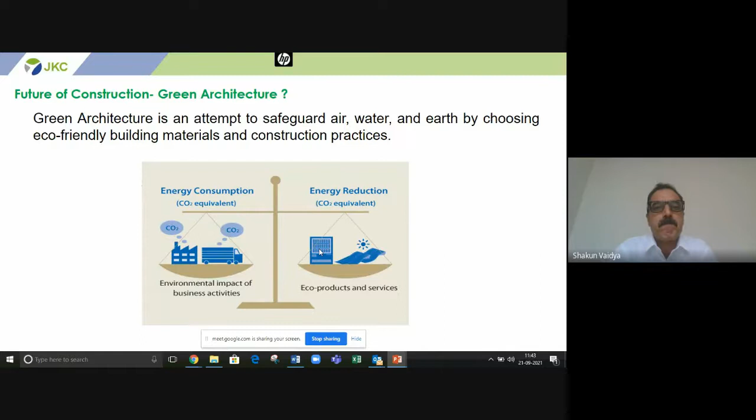So why green architecture?

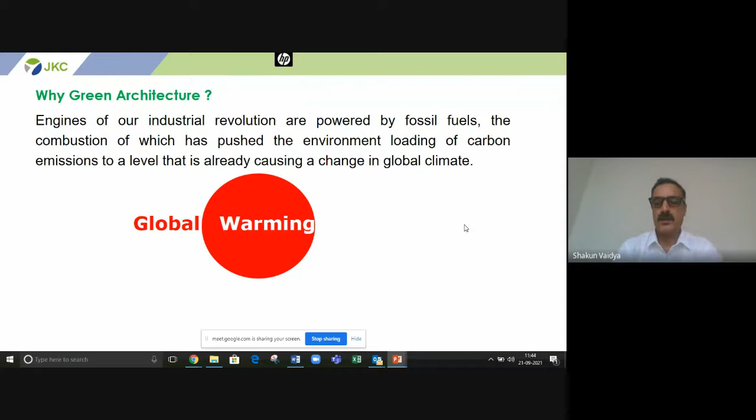Industrial revolution is powered by fossil fuel, the combustion of which has pushed the environmental loading of carbon dioxide to a level which is causing change in the global climate. So it is an alarming situation as of now. And how do we address this? In today's era, we continue to run businesses for short-term benefits with no attention on environmental and other consequences arising out of this activity. Not a very sustainable way of doing business.

If we consider cement and concrete, there is the requirement of high strength concrete.

Am I audible? Yes sir, you are audible. All participants please keep your mic in mute mode. Sir, slides are not moving, from the third slide onwards. Ma'am, it's moving, maybe there is a network issue in your device. Now the slide is opened. Probably bandwidth issue, some participants might be having net issues, that's the reason there's a lag between transmission and reception.

So as I was discussing, the requirement for high strength concrete has been there for ages now, resulting in a lot of production of OPC. This scenario changed in the early 90s when the cement industry switched over partially from OPC to blended cement variants like PPC and PSC.

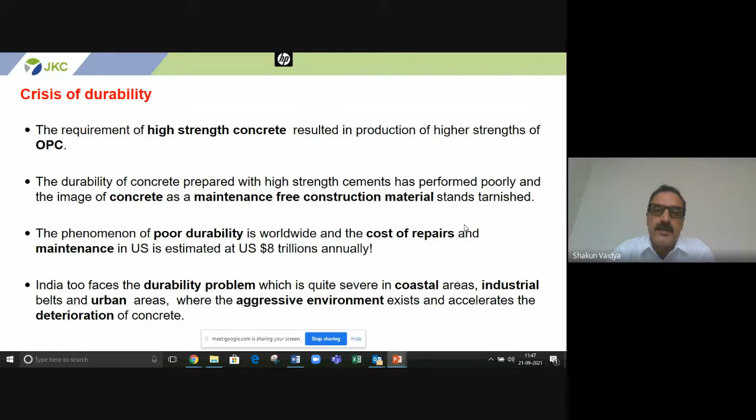So this challenge is there in our own country. And how is the cement industry addressing this? I'll let you know in the coming slides.

So what is cement? Cement is a glue which binds everything together. Technically speaking, hydraulic cement produced by pulverizing clinker, consisting essentially of hydraulic calcium silicates, usually containing one or more forms of calcium sulfate as an interground addition. A commonly known definition is a material with adhesive and cohesive properties, which make it capable of bonding mineral fragments into a monolithic mass as a whole.

Concrete has to be cast monolithically, and concrete is where the entire load of a structure comes, and 70% of the cement gets consumed in concrete. Concrete is important because it is one of the most consumed materials on earth after water. It is also said that it is one of the most revolutionary inventions, after the invention of fire and wheel. So concrete is very important. All structural members are built with concrete. So it is imperative that we produce concrete with eco-friendly materials which are far more durable and long-lasting.

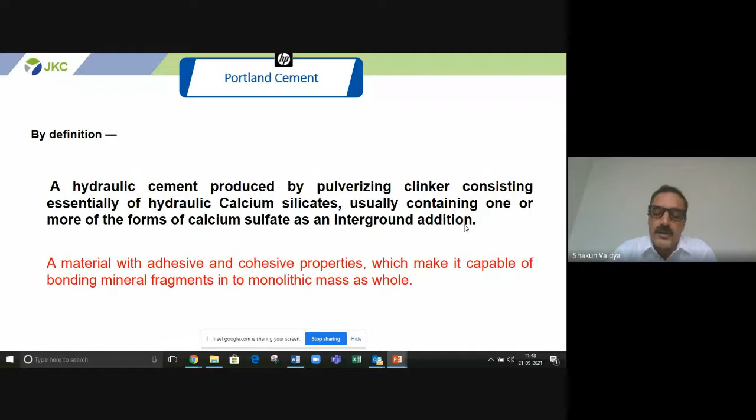Typical types of cement as per IS 456-2000: we have OPC grades of 33, 43, 53. Now this has also changed. The IS number is now IS 269 for 43 and 53 as well. So it is IS 269 33, IS 269 43, and IS 269 53 now.

And then we have other variants, but the most widely used material is PPC, Portland Pozzolana cement. And then in east and parts of south, we have slag cement. And the most latest variant is composite cement, which has not been enlisted in IS 456-2000, the latest edition of IS 456, but we have a BIS code for that, so it is also there. Apart from that, some special types of cement are also there.

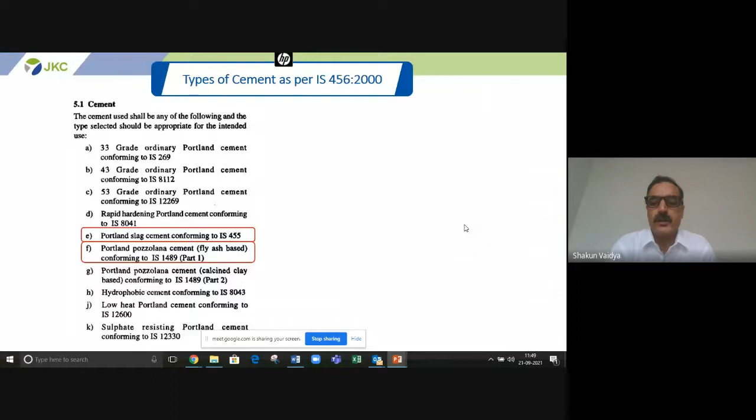So considering typically the Indian market, what's the breakup of cement usage? OPC was 90 to 100% if we consider the era before 1990. Post that, now it is PPC. PPC is a binary blend between Portland cement and fly ash, which gives us silica, or PSC, which is also a binary blend, Portland cement mixed with slag sourced from steel plants.

And then the latest variant launched in India is composite cement. It is a ternary blend, a mixture of Portland cement mixed with PPC and PSC both put together. Then we have some special grades of cement: sulfate resistant Portland cement, oil well cement, super sulphated cement, high alumina cement. These are very special cements required for specific requirements and constitute about 2 to 4%, manufactured on specific special orders, not as a practice. So mostly it is PPC, which is present through the length and breadth of the country and is one of the most popular variants of cement available right now.

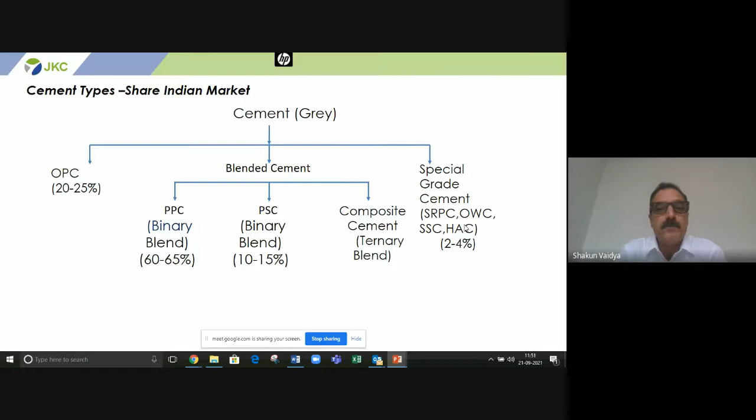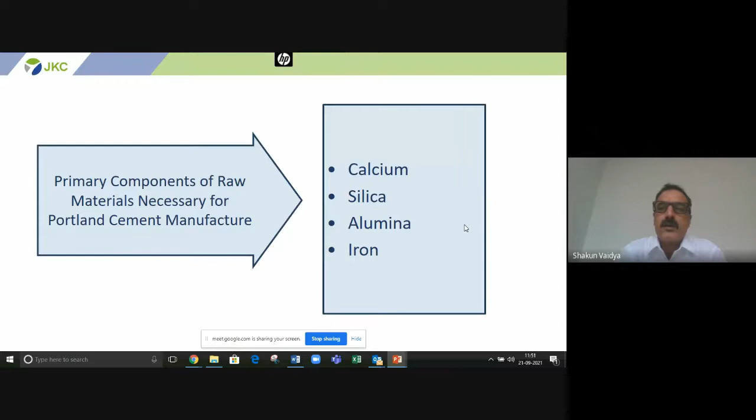The primary constituents of raw material necessary for producing Portland cement are calcium, silica, alumina, and iron.

Raw materials for producing clinker are majorly limestone, and then iron, alumina, or bauxite. Raw materials for producing cement are clinker mixed with gypsum. Gypsum will retard the setting time of the cement. This is how cement is produced.

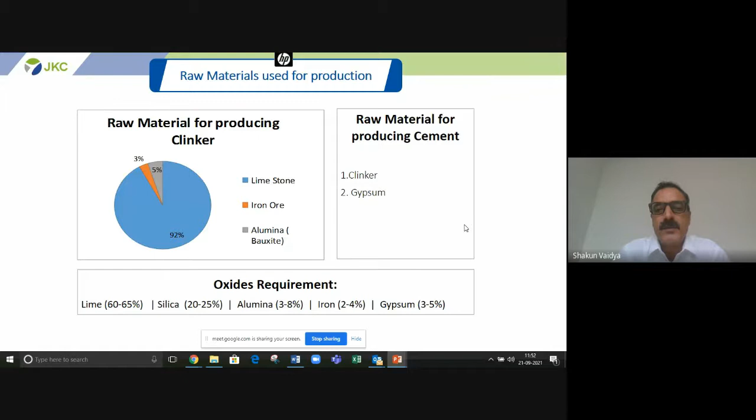The typical oxide requirements are that lime should be around 60-65%. In clinker, silica 20-25%, alumina 3 to 8, iron 2 to 4, and gypsum. Gypsum, as I told you, is mixed in the end to retard the setting time. Unless this is mixed, cement may set instantaneously. So this is just to retard the setting time, which facilitates easy usage of cement.

Pozzolanic materials are lime and silica-rich materials. Typically, it is silica only. In fly ash, it is silica, and in slag, it is lime as well as silica. Fly ash is silica-rich material, which reacts with cement and helps enhance its cementitious properties. They may not have cementitious properties on their own.

Common sources are volcanic ash, burnt brickbats, clay, rice husk, fly ash from thermal power plants. Fly ash from thermal power plants in India is one of the major sources, where we get silica-rich fly ash, which is blended with cement. India's thermal plants are in abundance throughout the length and breadth of the country. So we have a lot of thermal plants where coal is burnt and energy is produced. As a resultant, we get fly ash, which is brought to a good constructive use by the cement industry.

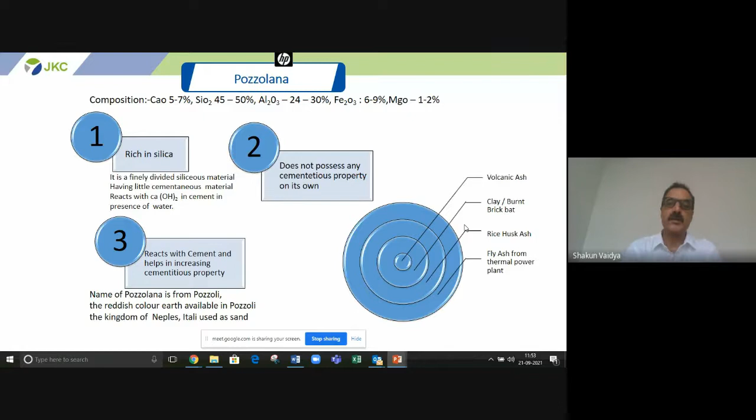These are the phases of clinker, and as is visible, C3S and C2S are the two major compounds responsible for the early strength. 1 to 7 days strength is solely responsible by C3S. Initially the gain of strength is very rapid in the initial 6-7 days. Then it tapers down, and the balance is almost through C2S, with small fractions of C3A for high early strength and C4AF as a flux.

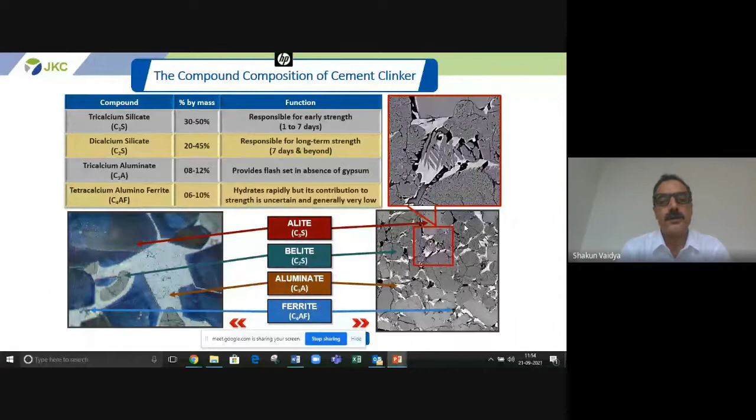So what are supplementary cementitious materials? How do they benefit cement and concrete and result into durable structures?

Portland cement mixed with water - typically this is how cement is used. The resultant product is calcium hydroxide, Ca(OH)2. Too much of Ca(OH)2 may result into making the concrete unsound.

The excess Ca(OH)2 reacts with the silica of the SCM, and it produces a byproduct known as calcium silicate hydrate gel. This is the secondary reaction, and this calcium silicate hydrate gel, through the reaction, produces a secondary glue, I would say, which further reinforces the concrete.

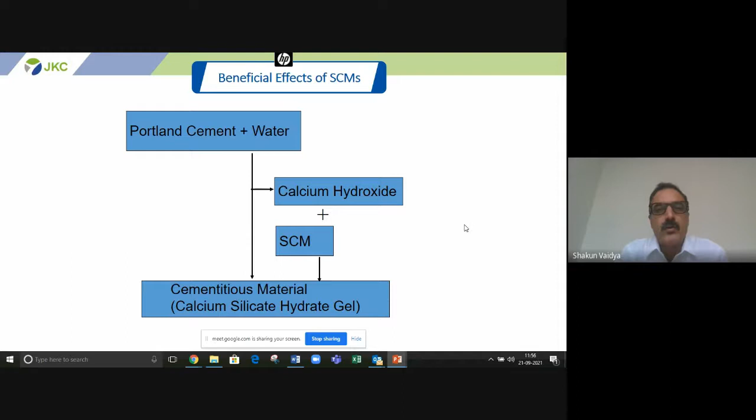The capillaries are choked, they become more refined with passage of time, and capillaries are absolutely blocked if the environment is conducive. So this is how a typical blended cement chemistry works - pozzolanic material plus calcium hydroxide plus water produces CSH gel, which further reinforces the concrete and blocks voids and capillary pores, lowering permeability and increasing durability.

The challenge is only to lower the permeability of concrete. Finer the pores, the more refined they are, the lesser is the probability of moisture or other chemicals reaching the embedded steel.

So the challenge is only how to preserve the steel in RCC, because we cannot think of building structures nowadays - 100, 120, 150 storied high skyscrapers, long bridges of several kilometers, flyovers, busy highway intersections - cannot be thought of without RCC. And in RCC, the only challenge is how to keep the embedded steel inside the concrete in a passive state so that it does not corrode and carbonation does not take place.

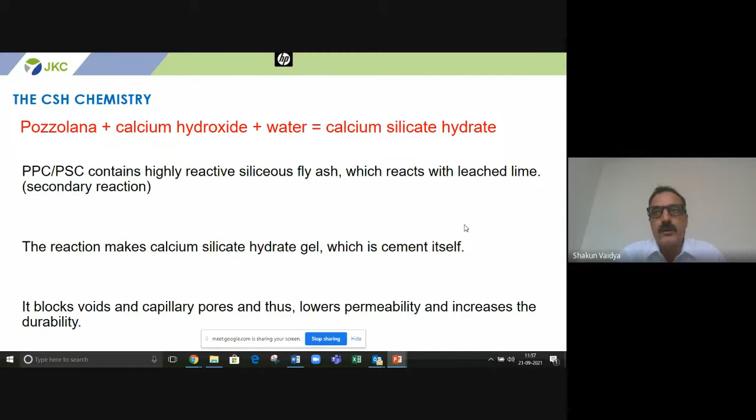So why blended cements? Blended cements produce more durable concrete through blending with supplementary cementitious materials.

Fly ash and slag, as I told you earlier, are the two most commonly used supplementary cementitious materials. Slag is rich in lime, as you can see, while in Portland cement it is high and rich in lime, and then silica is also there. In fly ash, it is rich in silica but has less lime, negligible lime quantity. In slag cement, it is rich both in lime as well as silica. So this is typical chemical oxides for various SCMs.

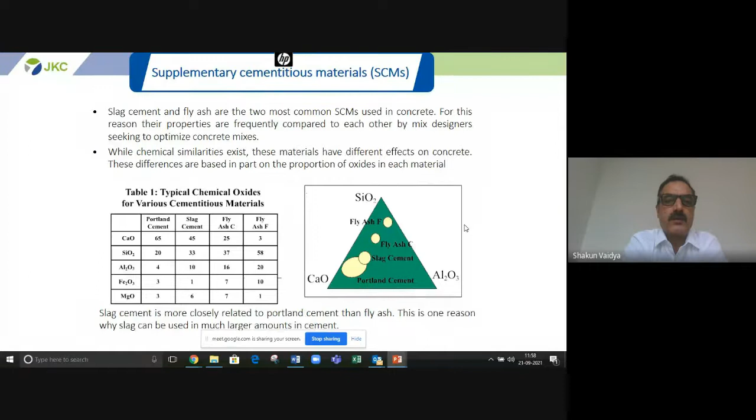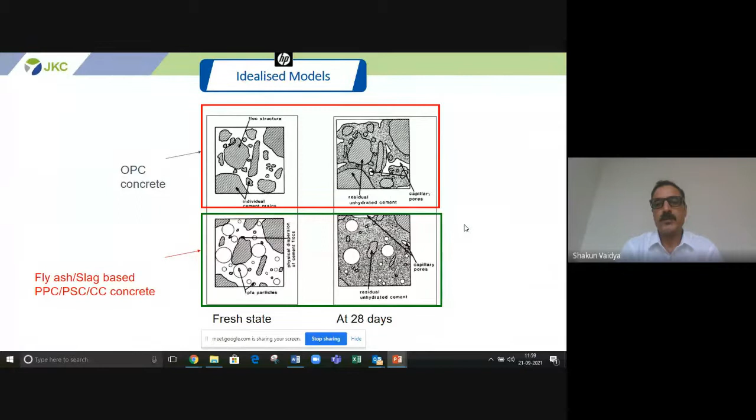Idealized models of concrete show at the top OPC concrete made with ordinary Portland cement is much more fragmented, while concrete produced with fly ash or slag based cements shows much more refinement, appearing much more dense and impervious at 28 days. This is how pore refinement should typically take place.

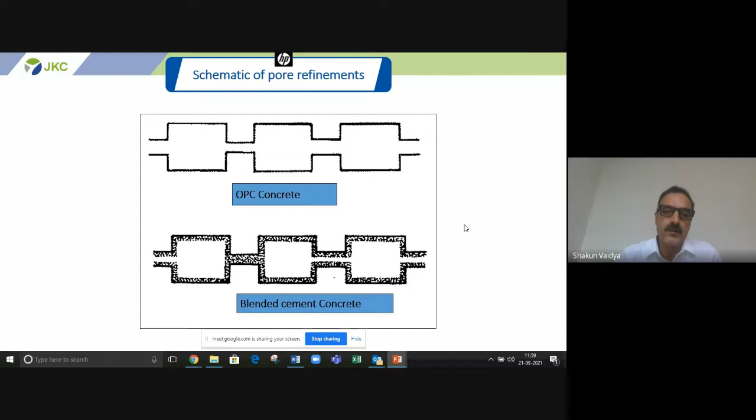With passage of time, if the environment is conducive, it has been established worldwide that any design strength would achieve double the strength in 8 to 10 years. So M20 can achieve a strength of M40 and even higher with blended cements if due care is taken.

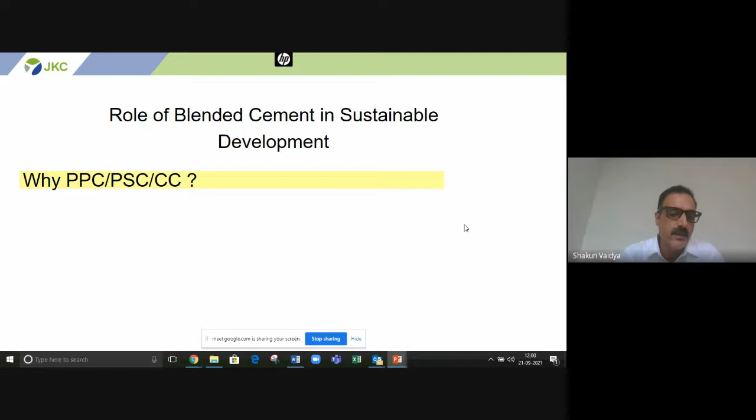So what is the role of blended cements in sustainable development? Why Portland pozzolana cement, slag cement, or now composite cement, which has been introduced in some parts of India? Though I belong to the cement industry, cement industry is notorious for emitting a lot of carbon dioxide in the air. About 7% of the total carbon dioxide emitted is alone by the cement industry, and it is a compulsion to produce cement, especially for rapidly developing countries like India.

India is the second largest cement producer in the world after China. Though in terms of per capita consumption we are still less, in terms of production we are at number 2 in the world. One ton of cement emits almost an equal amount of carbon dioxide into the air.

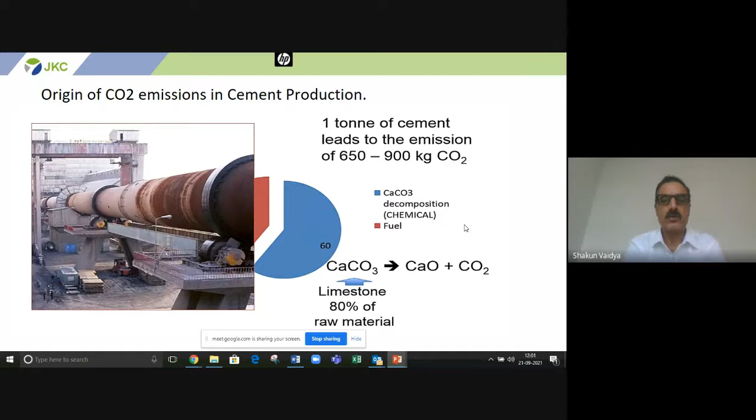Through the burning in kiln, CaCO3 drives out carbon dioxide, and the resultant product we get is CaO. Limestone is 80% of the raw material, as I showed in the earlier slides also.

As you know, limestone is required majorly to produce cement, and limestone is a natural resource, and natural resources are depleting fast, becoming a very scarce product. At the present rate of consumption, we may end up exhausting all our limestone reserves in the next 40 to 50 years.

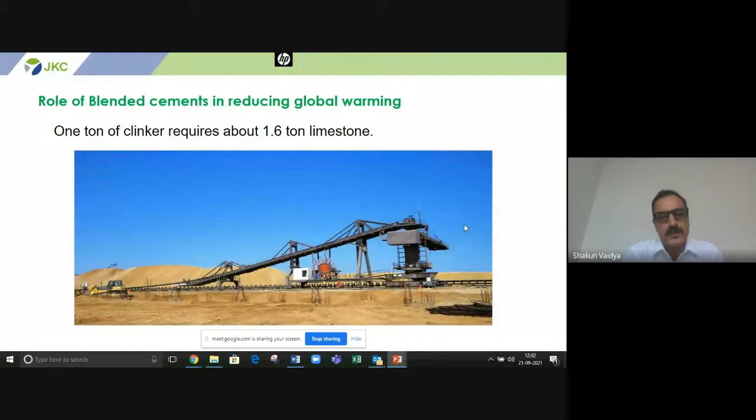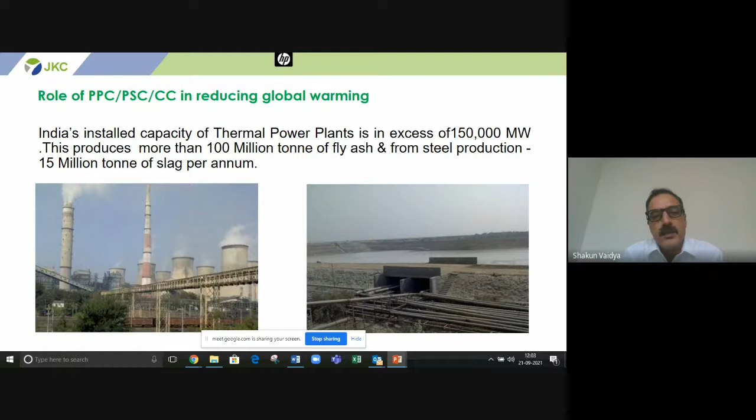Apart from limestone being in short supply, which may exhaust in 40-50 years, the second challenge is that in India electricity is produced majorly through thermal plants, so we have a lot of fly ash in abundance. We also have steel in many parts of India, majorly east and south. These are two products which otherwise cannot be used and can pose an environmental threat, but are effectively utilized in cement. So the cement industry is doing its bit by consuming a lot of fly ash and slag.

So by producing blended cements, how are we reducing global warming? CO2 emission can be brought down 25 to 50%. Fly ash utilization of 60-70% can be effectively achieved. And limestone reserves' life can be enhanced from the present 50 years to 100 years.

If we opt to go for blended cements, we require less clinker. Less clinker means less burning of limestone. Less burning of limestone means less burning of coal, and even lesser emission of carbon dioxide into the air. And this has been proven worldwide that concretes produced with blended cements are much more durable and long lasting vis-a-vis OPC.

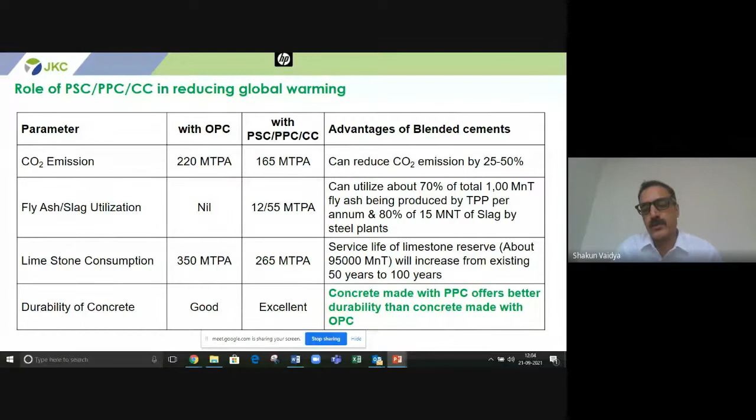So this is a three-pronged strategy for achieving sustainable development: reducing carbon dioxide emission, preserving limestone, and utilizing fly ash and slag, which otherwise can be a huge threat to the environment.

So think green, live green, and go green is the mantra nowadays. Every cement company is thinking of how to reduce carbon dioxide and how to become carbon dioxide negative in the coming years.

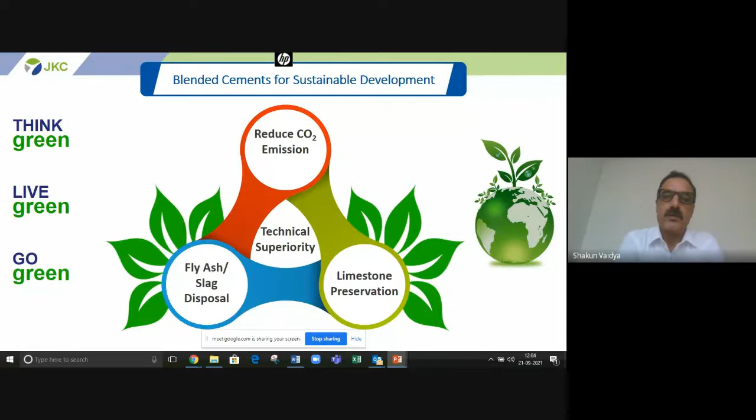The latest variant in this category is composite cement. Since PPC and PSC are known to everyone, having been introduced long back, now 3-4 years back, this new variant of blended cement, composite cement, was launched.

Though it is not available in this part of India, northern India, it is becoming very popular in East India, where this was launched around 3 years back, when the BIS permitted the use of composite cement and the code was also released. But since we do not have slag here in north and west, producing composite cement as of now is a challenge. Yet this is one of the very futuristic blends of cement, which uses fly ash as well as slag simultaneously with Portland cement.

This code was IS 16415. It was formed in 2015, released in 2016, and commercial production started somewhere in late 2017 in the eastern part of India. This permits simultaneous use of fly ash and granulated blast furnace slag or GGBS. NCCBM conducted a lot of studies on this, and investigation was carried out, and then this was granted permission.

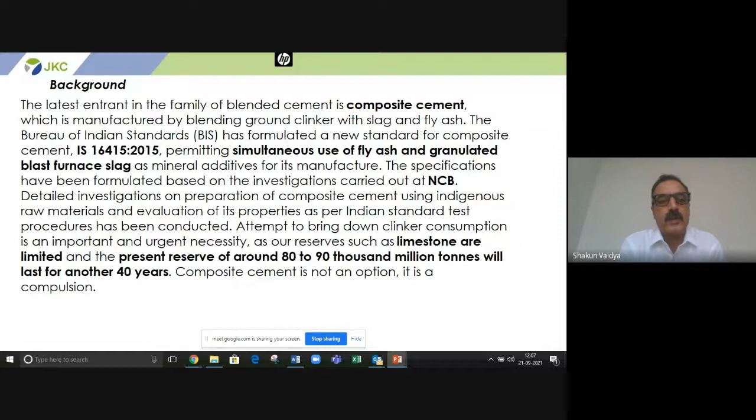Since limestone is limited, this is a very practical solution to bring down limestone consumption, apart from other variants like PPC and PSC.

Composite cement is produced by intergrinding or intermixing of clinker, granulated slag, fly ash and gypsum. This enhances sustainability, reduces the clinker factor, and effectively uses byproducts such as fly ash and slag.

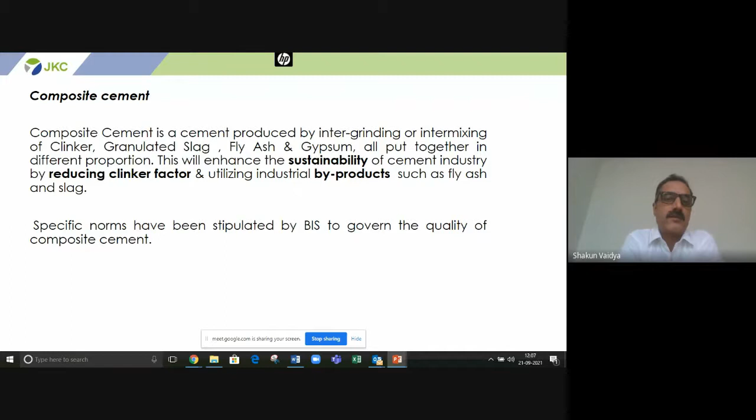It is an all-rounder, you would say, because we can say that it has the toughness of steel and strength of silica. Slag, though not steel, is a byproduct of the steel industry, and the silica is very reactive.

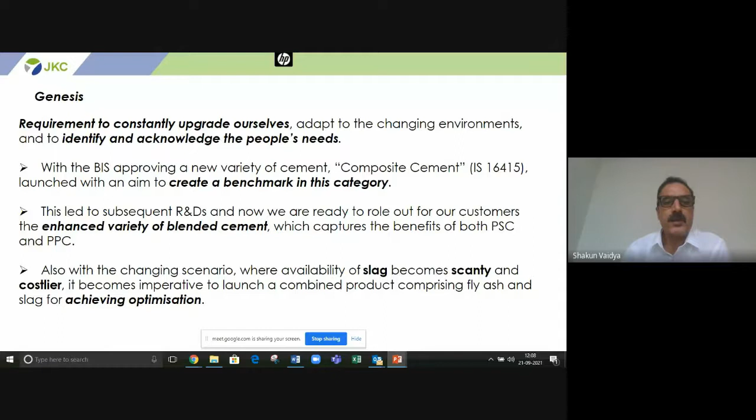So why this need of composite cement? Because we need to constantly upgrade ourselves, identify and acknowledge the requirements of today. It was launched to create a benchmark in this category, which led to a lot of research and development, and an enhanced variety of blended cement was launched.

Composite cement, by definition, is an intimately ground mixture of OPC clinker, granulated slag, fly ash and gypsum. The permitted proportions as per IS 16415 are that clinker proportion varies from 35 to 65%, cannot be less than 35, can go up to 65.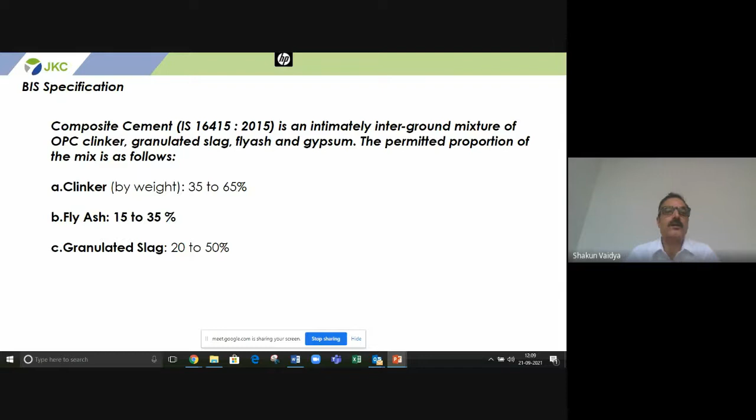Fly ash proportion is 15 to 35%, GGBS is 20 to 50%, but the combined blending of fly ash and slag cannot exceed 65%, with a lower limit of 35%. This is the broad guideline given by the Bureau of Indian Standards.

The same specification has been given here. The physical parameters of this cement almost match the physical parameters of other variants such as PPC and PSC. I'll show you a chart in the coming slides.

It has to have a minimum fineness of 300 meters square per kg. It has to be sound, so 10mm or autoclave 0.8 is the permitted value in percentage.

Initial setting time, the time period after which hardening should take place, is 30 minutes. Final setting time is 600 minutes - this is the time when the paste or concrete should ideally lose plasticity and start hardening.

Compressive strength is common for all the variants at 3, 7, and 28 days: 16 MPa, 22 MPa and 33 MPa or 330 kgs per centimeter square is the requirement, similar to PPC and PSC, and drying shrinkage is 0.15.

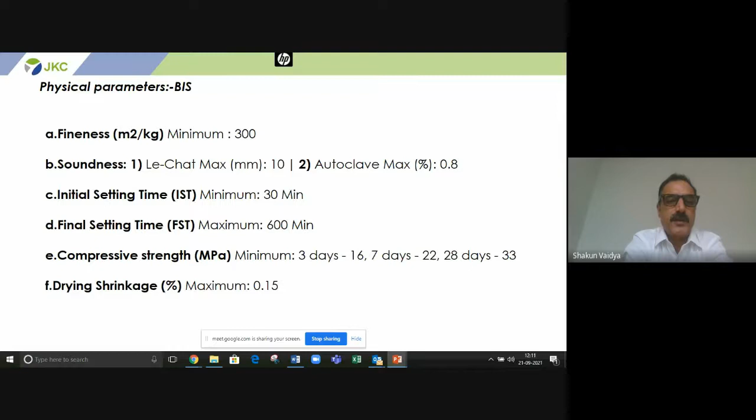Chemical requirements: insoluble residue ratio is arrived at by this formula, where X is the declared percentage of fly ash. MgO makes the mix unsound, so this is the percentage given here. SO3 content, sulfide sulfur, loss on ignition - these help arrive at the impurities present in the cement.

This is also an indication of the fly ash present, which is 5%. Chloride content is very important to track - 0.1 for normal concrete and 0.05 for pre-stressed concrete. This is very important because it initiates corrosion. Alkali content 0.6 is the permitted percentage, similar to slag cement.

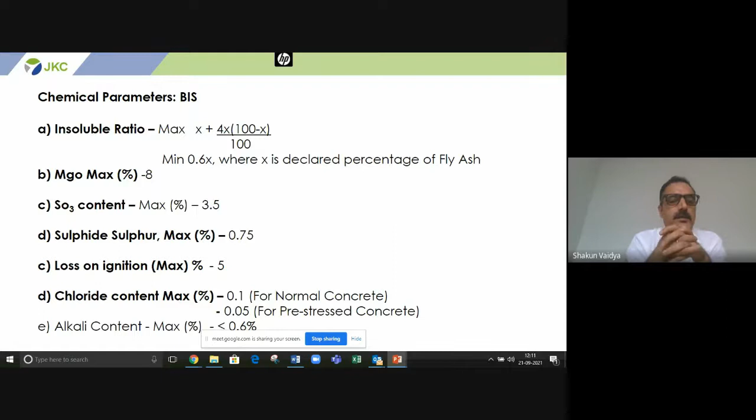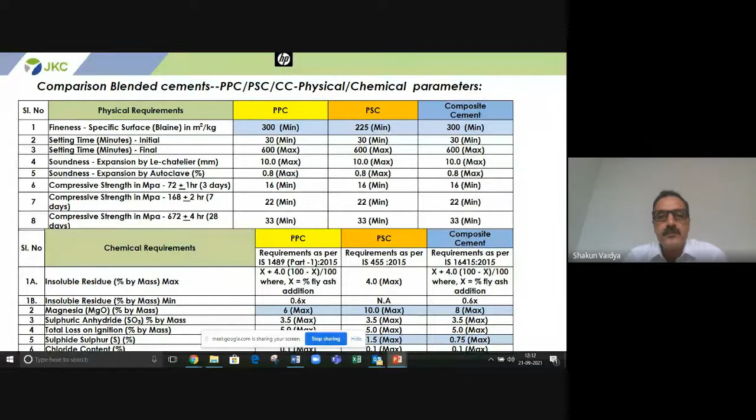So in a nutshell, comparing PSC, PPC and composite cement, you can see that it is almost similar, barring the chemical requirements where we do not mix fly ash. So this X factor is not there in PSC. Otherwise, other parameters are almost similar.

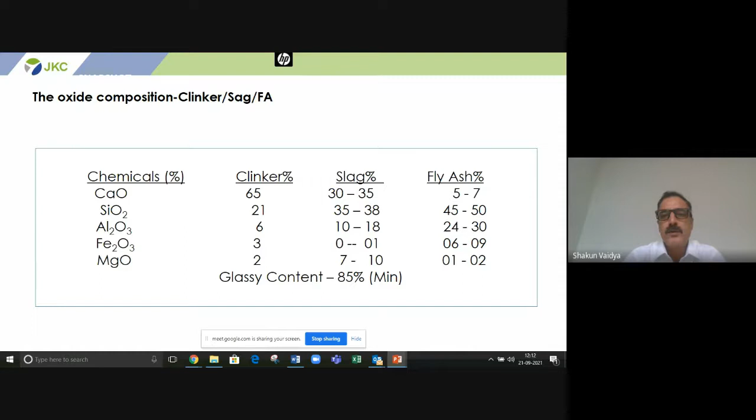The only requirement of a supplementary cementitious material is that it has to be rich in silica, or rich in lime, or rich in both lime and silica. This table was displayed earlier - slag should be rich in both lime and silica, and fly ash rich in silica.

So OPC properties and its suitability. For ordinary Portland cement, the compounds C3S and C2S should be around 48 to 58% and 15 to 25%. These are the major two compounds which enable the cement to gain early strength - 1 to 7 days for C3S, and 7 days and beyond up to 28 days for C2S.

So high C3S and high C3A clinker cements are ideally suitable for blended cements, especially composite cement.

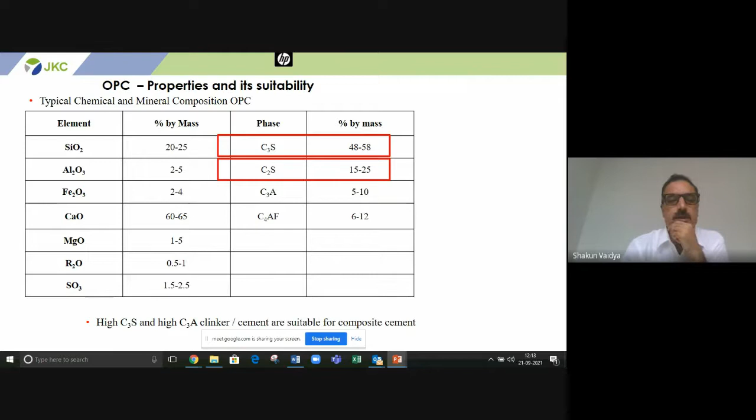Blast furnace slag, or granulated blast furnace slag, has quality and variation. As I told you, these are tests conducted on various slags from different sources. It has to be rich in lime and silica, and the ratio of lime to silica should ideally be more than 0.9. This sort of slag is suitable for blending.

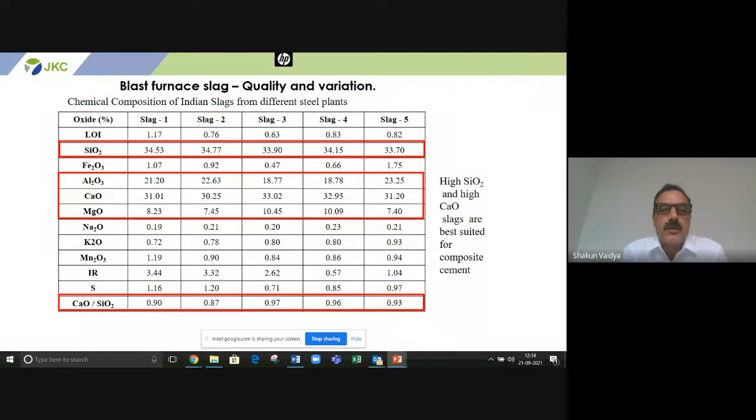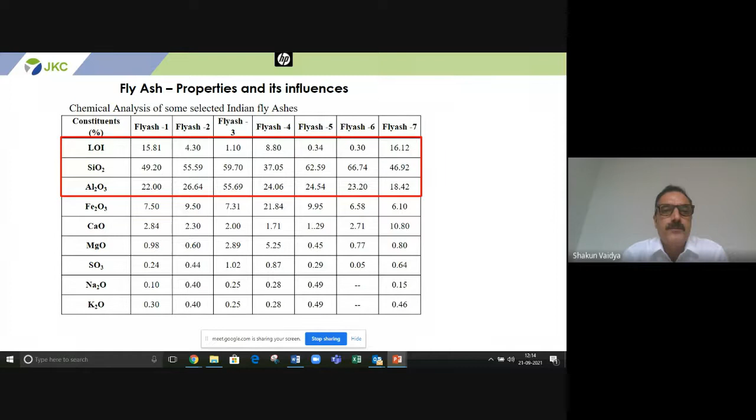So composite cement is a futuristic blend of slag and silica. It has a pH balance technology, where shortage of calcium hydroxide, if totally consumed in PPC, may result in lowering of the pH value, which should not go below 12, which may initiate corrosion. And excess of lime in slag may also result in leaching, free lime, and alkali silica reaction.

So composite cement is a mixture of both, where the shortcomings of PPC and PSC have been well taken care of in this futuristic ternary blend, where the pH value of 12-13 would be maintained for a longer period of time, thus ensuring that the reinforcement or embedded steel in concrete remains in a passive state for a longer period of time.

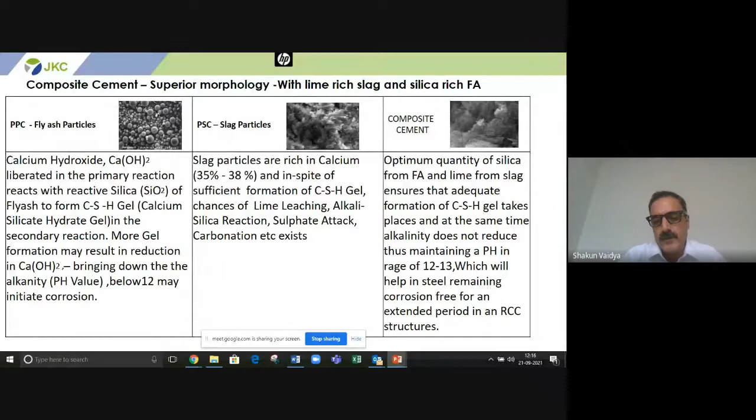So angular particles of slag and spherical particles of fly ash also provide a better packing density. Heat of hydration is also on the lower side, which is a very critical requirement, especially in mass concreting works.

As you can see, OPC has the maximum heat of hydration. That's the reason this is not considered a very sustainable product now, because more heat of hydration means more formation of capillaries and pores, and ultimately pervious concrete. As is visible, both in 28 days as well as 7 days, composite is the least, and PPC and PSC are also equally efficient vis-a-vis OPC cement.

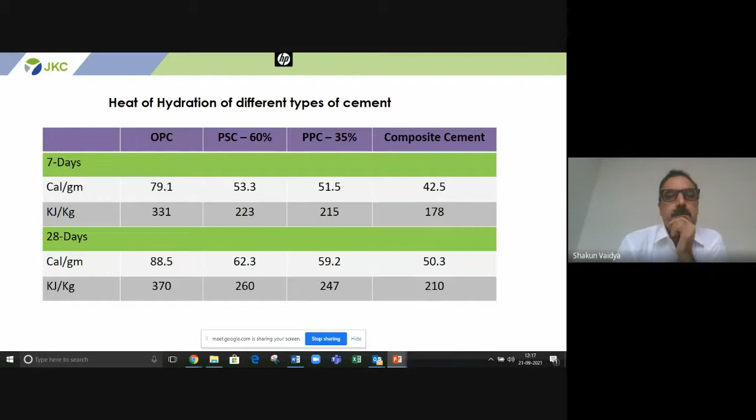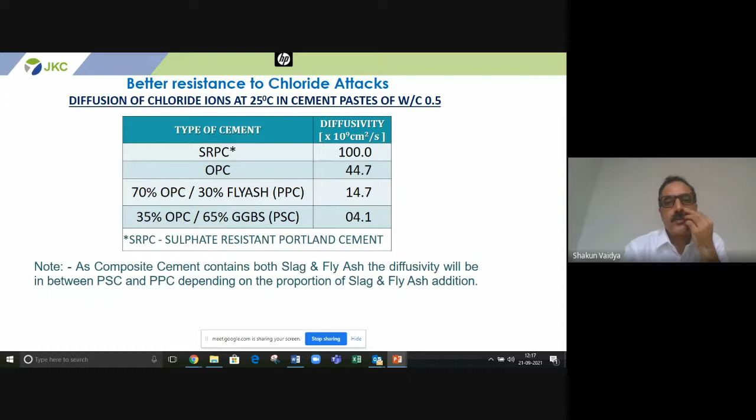So regarding chloride attack, as I told you, this will corrode the steel. Chloride diffusion test is conducted, and it has been noted that SRPC, which again is an OPC cement, is 100%. OPC is around 44, 45, and you can see that OPC with GGBS, OPC with fly ash, it is also less.

So NCB carried out detailed investigation on resistance to chloride penetration, as was shown earlier, and there was a remarkable improvement in the compressive strength in composite cement concretes at a later stage. The synergetic effect of addition of fly ash and GGBS together gave this benefit of better strength at a later stage, and the synergic benefit of both GGBS and silica particles of fly ash and slag gives a better packing density as well.

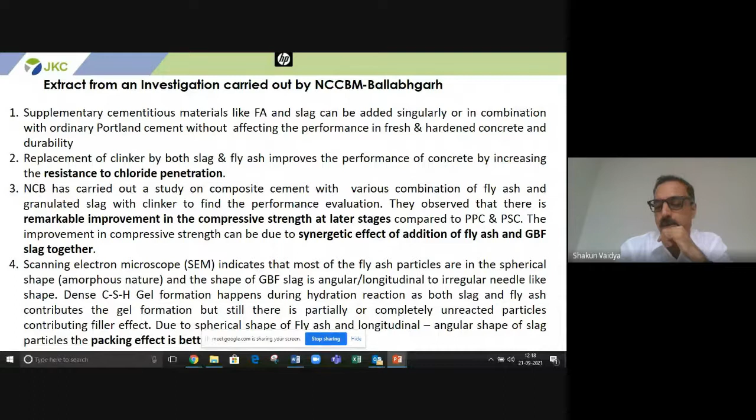So a lot of publications have published studies about composite cement vis-a-vis other variants, and obviously this is an established fact that it is better than OPC. This was also given in the Government of India issued public procurement order, where composite cement was also introduced some time back.

So addition of fly ash and slag impacts the properties of cement. This is applicable to both PPC, PSC, all the varieties of cement. These are very good varieties of blended cements. So how does it help? It gives better workability,

optimized setting, very good compressive strength, lower drying shrinkage, better sulfate resistance for areas like sewage treatment plants or areas prone to chemical attacks, and prevention of alkali aggregate reaction, especially in hilly areas where the aggregate is reactive, a reduction in carbonation, resistance to freezing and thawing effect for areas with sub-zero temperatures, and lower permeability with high durability. Lower the permeability, higher the durability.

This is a thumb rule. So yes, we need to make the concrete more and more impervious and lower the permeability of the concrete as much as we can, because in absence of capillaries and pores, the embedded steel would be corrosion-free for many, many years.

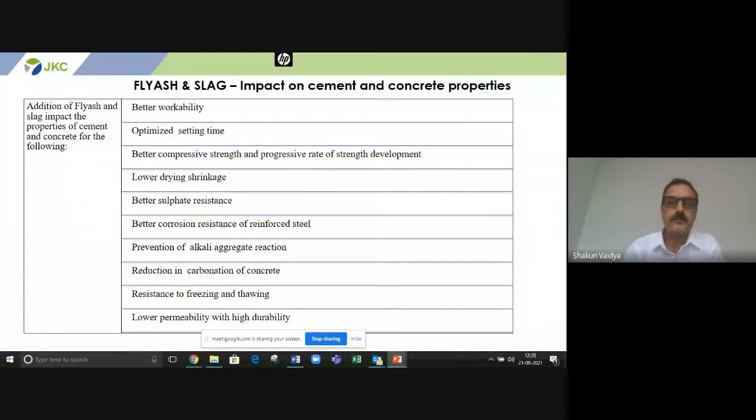So low carbon footprint, less power consumption, low heat of generation, reduction of thermal cracking, reduced bleeding, environmental friendly structures, all can be achieved with blended cements.

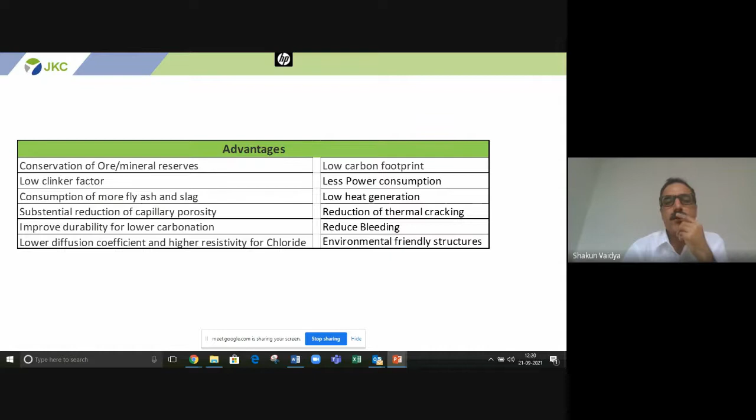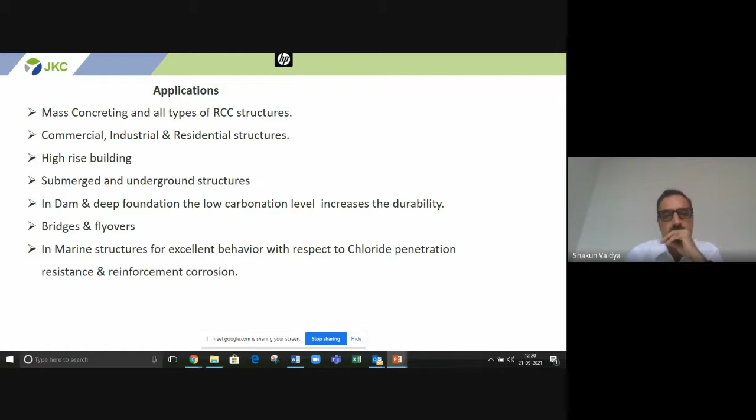So in terms of applications, it can be practically used for any application, mass concreting, so it is ideally suitable. Commercial, industrial, residential projects, high-rise buildings, submerged underground structures, again ideally fit for aggressive environments, dams, deep foundations, bridges, flyovers, marine structures, with excellent behavior with respect to chloride penetration resistance.

So blended cements have been recommended all over India for all the DMRC projects for underground structures. So fly ash and slag are complementing each other, they are complementary. Incremental use of slag in place of fly ash shows a reduction in water demand, so we achieve better workability at a lower water cement ratio, resulting in high strength.

Composite cement, by way of intermixing, shows better properties. Ideal clinker should have a C3S content of 50% and C3A content of around 8%. Composite cement has shown low heat of hydration. Composite cement with a clinker factor of more than 50% will exhibit better results in terms of sulfate resistance and alkali aggregate reaction.

So in terms of sulfate resistance and alkali aggregate reaction, we need to ensure that composite cement has a clinker factor of 50%, and we should not go to the permissible limit of 65% replacement of clinker.

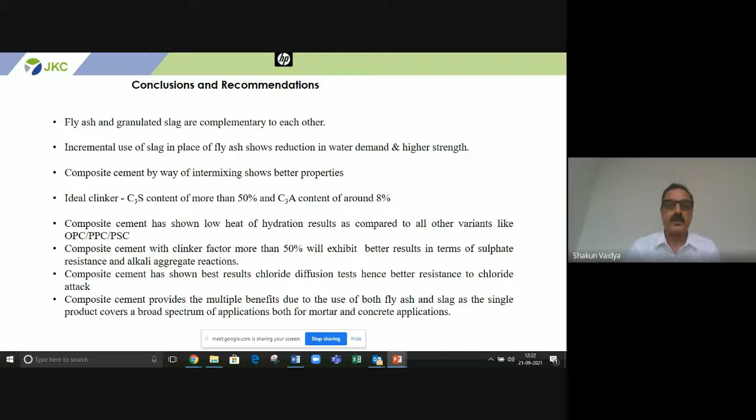Highlights of this blended variant of cement: better packing density, controlled particle size distribution. Cement is good when the maximum particles fall between 3 to 30 microns, so it has a controlled particle size distribution as well, and less bleeding and segregation.

Mixes are much more cohesive and workable. It is a perfect blend of slag and fly ash because silica and lime complement each other, giving improved rheology and enhanced consistent plastic and hardening properties of concrete. It is a continuous generation of CSH gel, and as this process goes on, it further reinforces the exposed concrete structures, and this gel makes the concrete more impervious and watertight in nature.

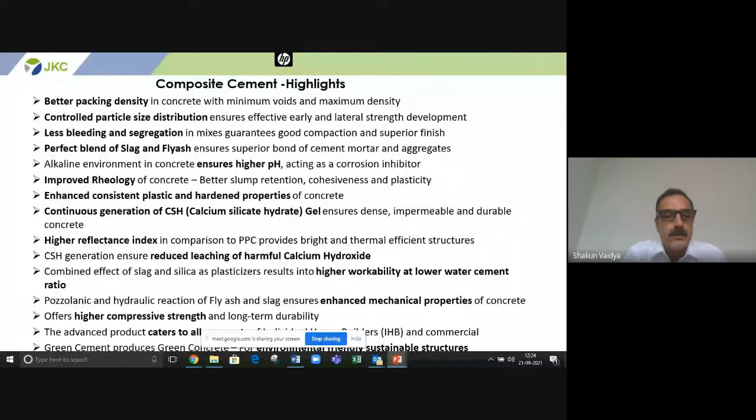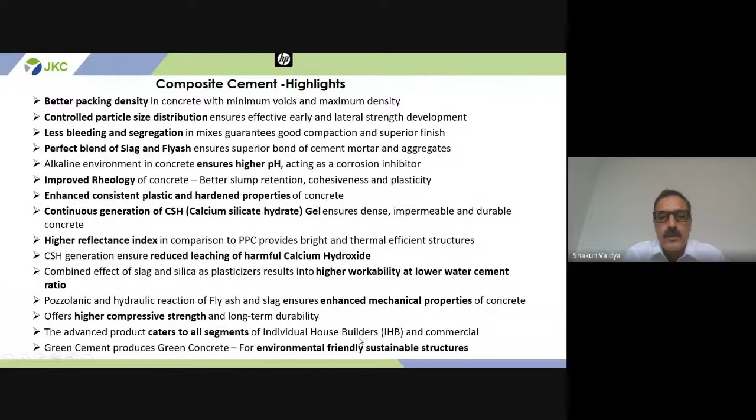Compared to OPC or even PPC, slag cement or composite cement is lighter in color. So structures built with such lighter colored cements will have better improved thermal properties vis-a-vis dark colored structures. And with high workability, as we discussed, and enhanced mechanical properties of concrete, it offers high compressive strength and caters to all the requirements. So this is all on composite cement.

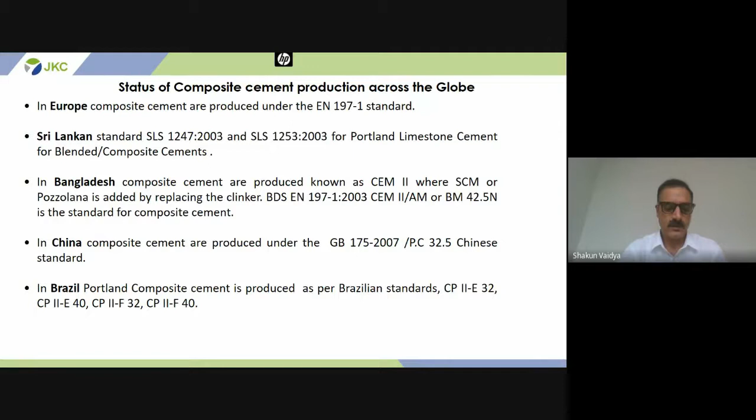Worldwide, as I told you, this code was formulated in 2015 and then launched in 2016. Production started in late 2017 in India, but in other parts of the world, this is a very popular blend of cement. In Europe, Sri Lanka, neighboring countries like Bangladesh, China, and even Brazil, this is an established category of cement.

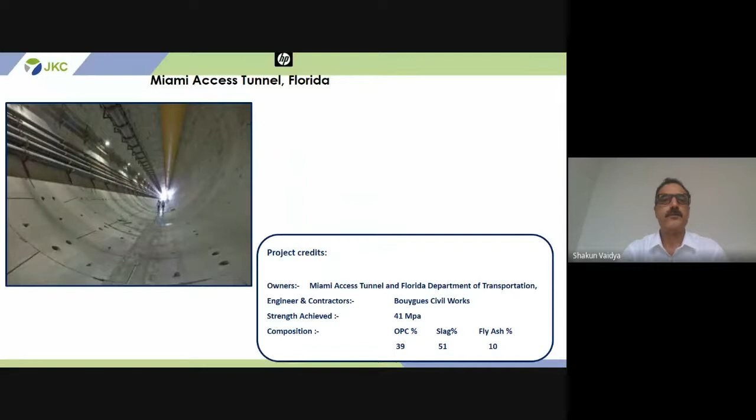So there has been a history of ternary blending - Eurotunnel, Akashi Kaikyo Bridge, Miami Access Tunnel - everywhere the mixes were a blend of slag and fly ash.

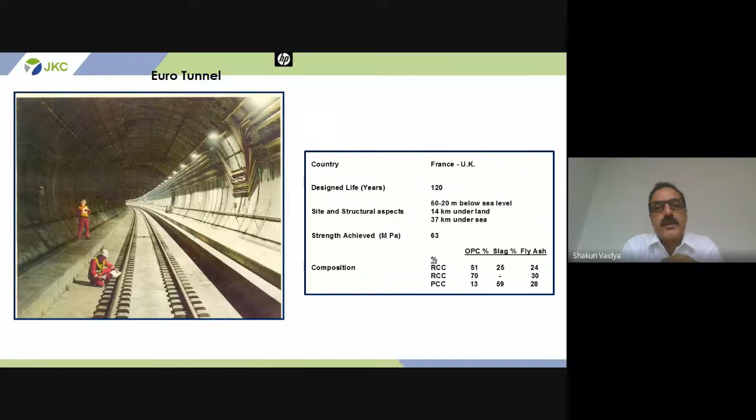So this was all about blended cements, and a few slides on the latest entrant into this blending cement category, that is composite cement, and a few slides on our organization, JK Cement, since I represent JK Cement. We are very conscious of the fact that we need to be more sustainable and green and promote green architecture, so there is emphasis on producing more and more blended variants of cement.

Though we produce OPC cements as well in a small quantity, our base product is JK Super PPC, and we also produce improved variants of PPC known as JK Super Strong. This is a product in South India, and JK Super Strong Weather Shield, the premium PPC, present in North India. So these are products with higher specifications vis-a-vis JK Super, and depending upon usage and requirements, we have a very differentiated product range, and it is up to the consumer to decide.

However, all the products in terms of specifications are head and shoulders above the BIS norms, so they can be applied anywhere. All JK products have varied applications practically everywhere.

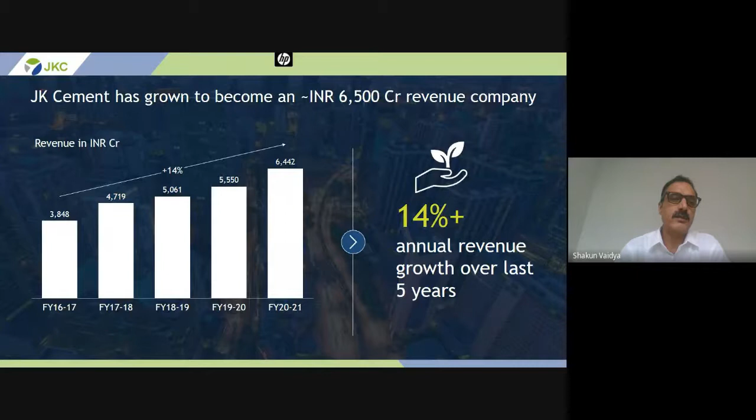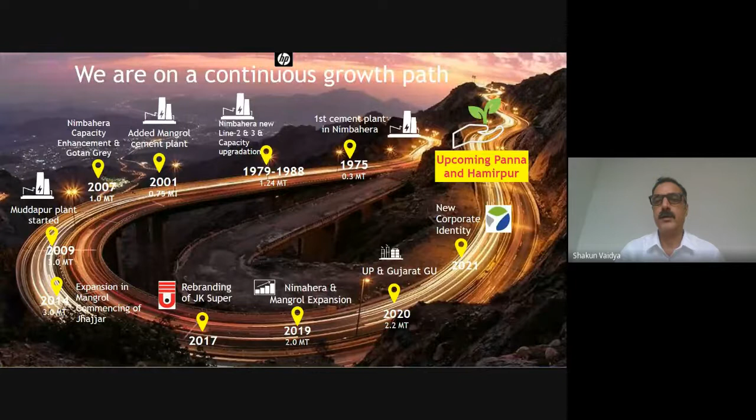Rebranding was done in 2017, and in early 2020 our two grinding units, Aligarh in UP and Balasinore in Gujarat, were established. Now we have an upcoming integrated plant in Panna, Madhya Pradesh, and a grinding unit in Hamirpur, Uttar Pradesh. So we are a 15 million ton company, and we'll be reaching 20 million tons very soon.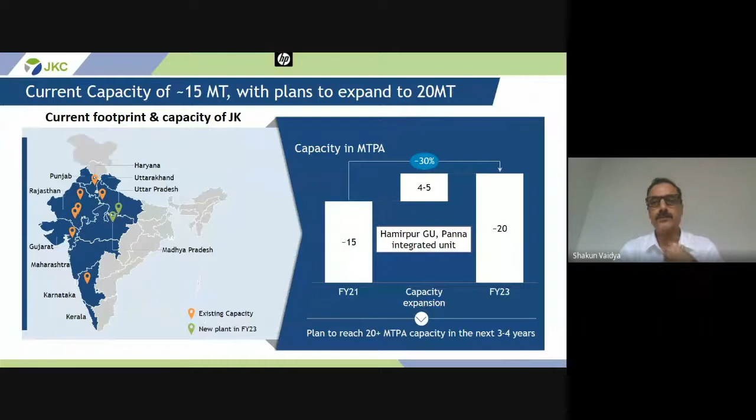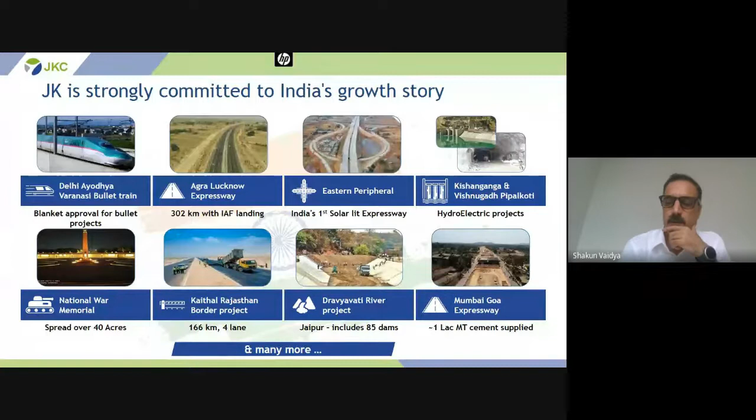We are committed to India's growth story. We are present in every project worth its name across the length and breadth of the country - Bullet Train, JK was the first cement to be introduced and endorsed right from the beginning. Then Agra Lucknow Expressway, Eastern Peripheral, Kishanganga, National War Memorial, Kaithal Rajasthan border project, Mumbai-Goa Expressway - everywhere we have been supplying cement in the institutional cement category as well.

We have been winning awards globally, and apart from grey cement, we enjoy a leadership position also in the white cement category. And yes, we are an organization which cares - we are participating in a lot of social, charitable, healthcare, educational, and religious initiatives across India.

So this was all about the organization JK Cement, and I thank everyone for a very patient hearing. Any questions, most welcome - we have some time.